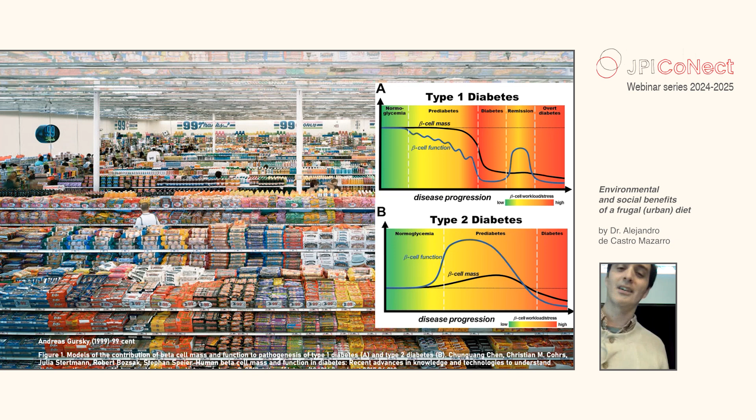It doesn't have to do with what people do with the bars or the supermarkets, but it's actually an illness stored in a very humble organ, the pancreas. The pancreas—if you cut one open, you will not see it directly—but you have to look at something called beta cells in the pancreas and see their performance depending on how you take sugar. There are two different patterns, and we could go on and on.

So basically, the idea is that healthy cities don't need to be necessarily nice cities, and sustainable cities don't need to be nice cities either, but they might be something different depending on how you look at health or sustainability. What I'm looking at is cities from a purely material perspective—what are these things that are on the crust of the planet?

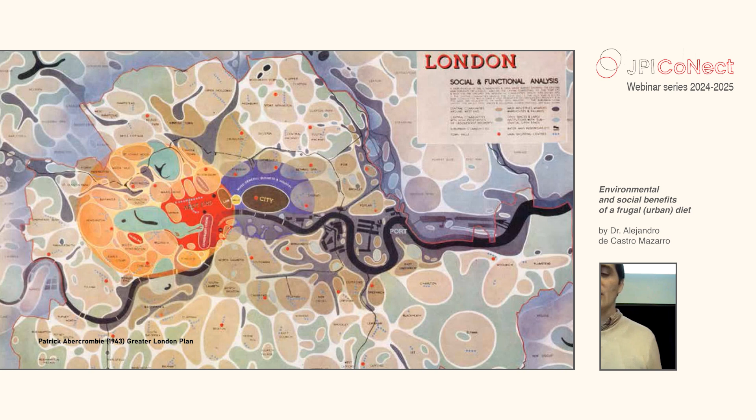This is something not new. This is a map from Patrick Abercrombie for the Greater London Plan, 1943, imagining the city as an organism that is evolving and growing and so on. But if you take this material perspective, one might look at cities slightly differently.

Now, how do cities become healthy—and I would say I'm calling healthy, say, sustainability—like a normative notion of a good city, a sustainable city, the way we understand them now, not only in Eindhoven, but the city of Dresden. When you look at it, fantastic greenery, there's a river, an old bridge that has been preserved—all of it is fantastic.

What is the normative idea of what a sustainable city is? Well, we don't have a collegiate body of doctors and so on that discuss about it. And I would even challenge to say that there is no theory of it. There are theories about it, I think there are discourses about it. And what I have been looking through my research is the discourses of sustainability within architectural production.

I would claim that the dominant discourse for sustainability, what I call eco-modernism, is the very assumption that Anna just mentioned, that economic growth is something positive when coupled with high-tech industrialization because it can provide social equity and even reduce environmental harm. This is not something a couple of people with black jackets thought in a room, but it's something that comes throughout the 20th century.

Particularly, aligned with modernization theory, this might come from what is called the Kuznets curve. Kuznets, a Nobel Prize winner from the US who coined and kind of organized what we call now GDP, accounting for how many assets a country has, found in historical research that he did in the United States that between the late urban industrialization and the 1950s, the growth of income grew in the country, producing the following curve.

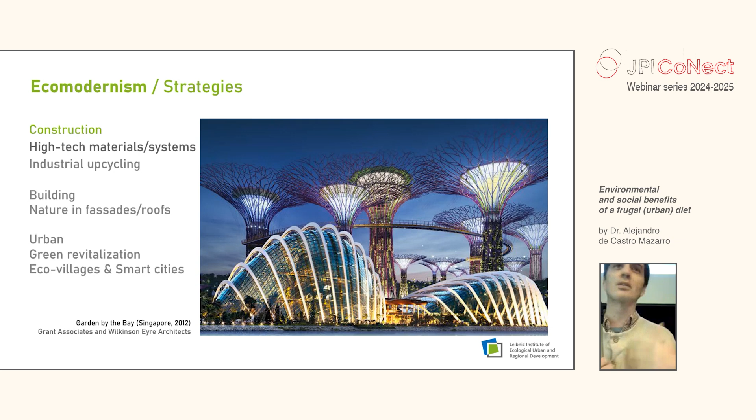This is with the example of Singapore Gardens by the Bay, which have a wonderful weather of subtropical cloud forests at the equator line, and somehow it's sustainable because the AC system is super efficient. At a building level, it has to do with the incorporation of nature in facades, the famous project Bosco Verticale by Boeri, and then at the urban level, eco-villages and smart cities.

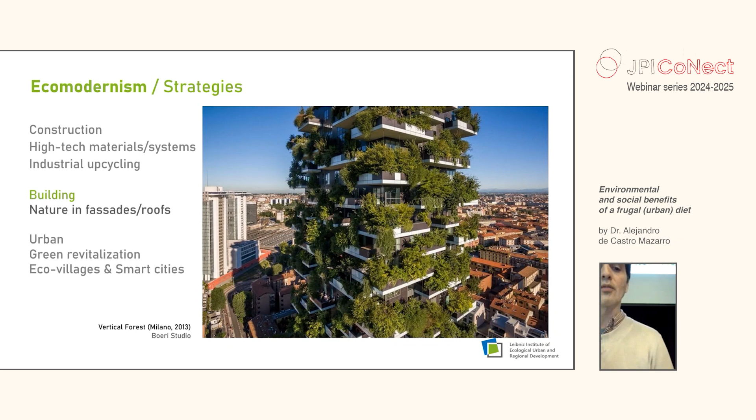I'm not going to stop on them. So that is where the normative dominant discourse is. However, there is some suspicious data that comes up when we look at the materiality of cities, not so much at the relative efficiency of new cities.

If you look at Germany, it consumes 66 hectares of new land every day for a population that is barely increasing. It increases the living floor per dweller, even though families are not bigger on average. We produce 6 tons of construction waste per person in a year, and buildings last very little, even those that are modern. So from a material perspective, we are producing and excreting a lot of matter.

From a material perspective, even very high efficient homes like this famous house from Werner Sobek is located in a place with extremely low density, in a very suburban area, which means that it's a very efficient house in a very low efficient settlement that requires a lot of piping, cables, lines, roads, asphalt, etc. So the material consumption, not the relative efficiency but the absolute material consumption, is to be doubted. Yet it's something that is not so easy to see. It might be super green, but it might still be digesting a lot of materials.

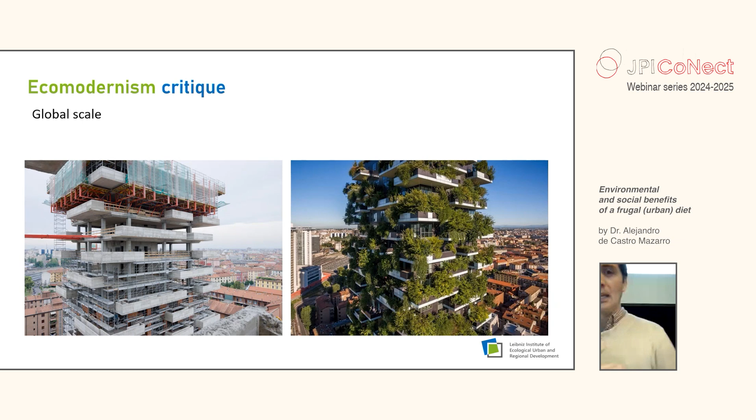Indeed, recent research has tried to compare how much anthropogenic mass produced by humans weighs compared to biomass. Don't ask me exactly how this was calculated, one could gauge it, the research papers are there. The research came to a very shocking realization: anthropogenic mass weighs much more than biogenic mass, meaning all plants and animals together are lighter than everything we have produced in history.

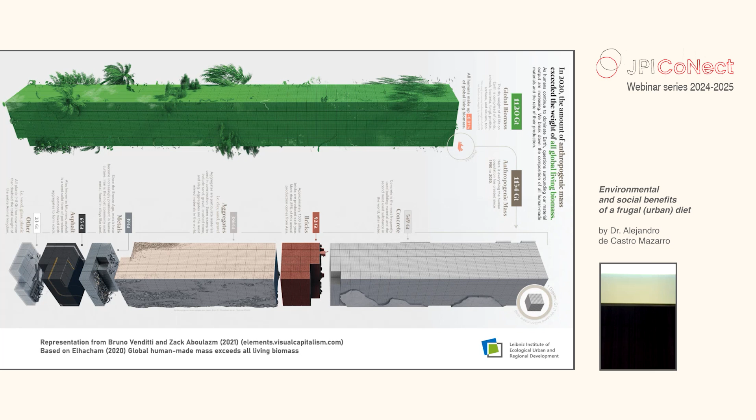And the interesting thing for us is that the author says maybe approximately 50% has to do with construction. If you look at the diagram, which I turned because it's very big, almost a third is concrete, almost one sixth is bricks, another third is aggregates, which include cement and sand, and then you have metals and asphalt, which is another one tenth. It's a lot of matter that we are digesting and producing and excreting, which is compatible with efficiency gains, but not with absolute material reduction.

Last but not least, post-growth or critical economic theories have been revising these assumptions of ecomodernism. Thomas Piketty, who you might have heard of, analyzed the continuation of the Kuznets curve—what happened with income distribution after the 1970s. And yes, income inequality rose, which means there is no natural distribution or redistribution of wealth through growth, but actually the opposite can happen.

Giorgos Kallis, a very renowned scholar, and Jason Hickel have recently published another very interesting research paper saying that there is no evidence that green growth is happening. When you look at GDP and material use, they are very much correlated, so the more GDP, the more materials you consume. And when you look at absolute material consumption per country, including Scandinavian, very advanced regions, countries are consuming more matter day by day.

So the critique is a bit obvious. Let me try to be faster.

The point of what I am trying to bring to my research now is to analyze the landscapes that provide those materials for cities: asphalt, cement, steel, etc. It's hard to know where to stop, because basically it's not that materials are taken from the landscape, but entire landscapes are materials. If you think about it, in the production of materials, water is quintessential. So we don't know how much water is required as aggregate in the German construction sector, but definitely you can imagine the numbers are extremely high.

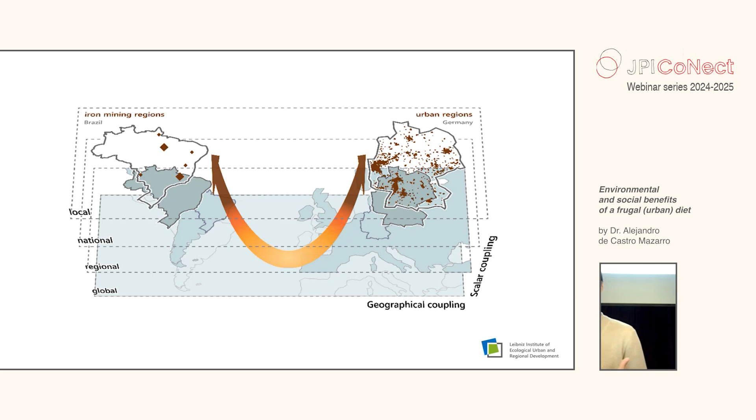So there is a historical question about the materiality of construction: where do cities materially come from? It's a long story, and I hope that I can share this discussion with you. I'm trying to really find partners for several elements, but it's a bit of a quantitative thing. So if that's a problem, post-growth or degrowth as a heuristic offers some frugal alternative to that.

In a nutshell, it is not opposed to efficiency. Efficiency is wonderful, but it proposes an absolute downscaling of resource consumption. So it proposes a democratic downscaling of production so that wealth and resources can be distributed where they are needed. So places that don't have trains can have trains, and places that have a lot of trains can reuse the trains or learn to recycle and so on, and try to decommodify wealth as a way to reduce the throughput, or reduce the metabolism of cities.

So rather than churning materials into a circular economy that goes faster and faster, they say the only thing we can do to reduce entropy is reduce the flow of materials. That's why they use sufficiency as a strategy compared to efficiency. They talk about convivial technologies, frugal innovations, which are terms that relate to simple ways of operating with materials. And of course, they relate to behavioral change.

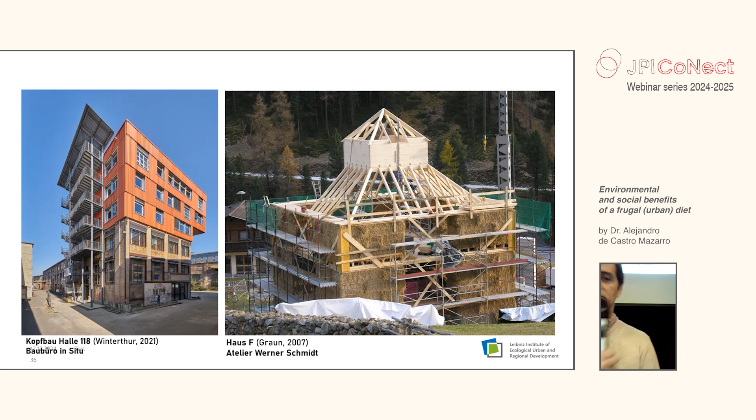At the material level, there is a lot of investigation now into how to use, I don't know how to call this in English, hay construction and mud construction. Straw bale, yeah. And from the material construction, there are some very creative experimental exercises. In more real works that I would recommend, Rotor in Belgium is a very interesting practice, really trying to make a business out of dismantling buildings. In Germany there are also new initiatives, with a site called Concular. It's kind of an eBay for building parts that is kind of working.

However, even though there are some very famous practices, this is where it's hard, because it's very hard to move away from structural concrete, in the sense that for insurance and density purposes, it's very hard to know who will insure a building that is not following the regulations of structural concrete. As you see here, this is a famous building that I am still uncertain, after having researched, whether it has concrete inside or not. I'm sure that the architect really tried to experiment, but I have not seen the section of every element. But you see Herzog & de Meuron, for example, in the Ricola Kräuterzentrum, done with earthworks, and yes, it's done with earthworks mixed with cement with structural concrete.

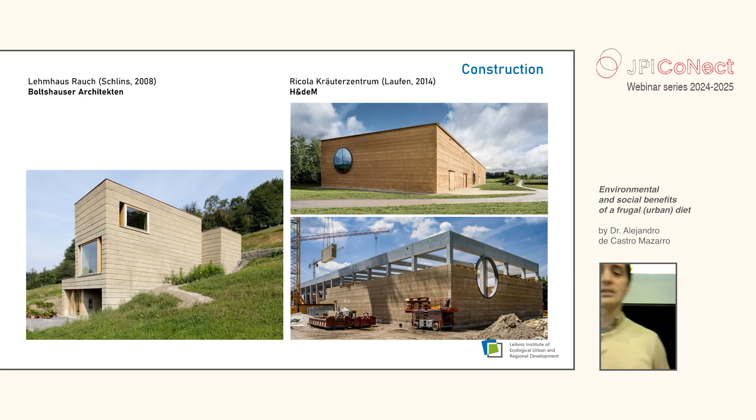So there are a lot of challenges, but I also find there is a whole new pedagogical field to develop. How do you become creative if the constraints are that you want to reduce the absolute amount of matter that you circulate? That is something interesting. The last part, and I'm over my time, so this will be very short. It's about some remaining challenges to this field.

It sounds like, after the second part, we would say: so you have the world for you, just do it and then do new buildings. It will work out fantastically. I tried it myself, out of self-esteem. I went to a competition with some colleagues in a city whose name I will not name, but it will be perfectly fine. We lost it. So I am advancing the end of this.

We lost the competition. So it was a city from the 50s, 60s, that was based on car traffic, very gray. People hated it. There was a survey for the neighbors. They wanted it to be pedestrian, no more buildings, please. We just want a place where we can be together, just as simple as it sounds. And we thought, well, this is a perfect place to make a competition on degrowth.

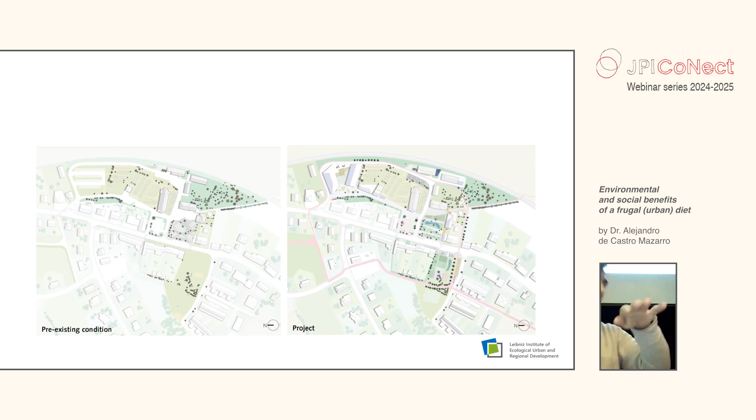So there I went with my colleagues, and we said, let's do a competition entry that is explicitly on degrowth or sufficiency. The title was "Small is Beautiful" in the local language, so that they know it. So it's really about that. This is before and after. What we basically did is try to keep all the buildings that we could, try to de-urbanize things following the scheme, reuse materials to recycle them inside, and put the program in the corners we could, changing the height of the asphalt in cases so that people could not trip. Very basic things, and we did some images of how it would look, etc.

And other things won, and I'm very happy for this. But it was very interesting what the jury said. It was really for me a way to test what they will say if all of this is good and it goes with the population. What will be the answer? The interesting thing is that the jury said, in the part on innovations, nothing. They wrote the word nothing. They said it doesn't propose anything. There is no added value.

This one won, and as you can see, it looks very nice. There is a building here on the top, another building, and there are other buildings there. They occupy, on the top left, the green area that was unused that the neighbors wanted to protect. So the interesting thing is that it's not just important to try to do things with less material, but there is another gap, which we're trying to figure out: how to express why those things are really relevant. The way that I name it is, why is that better than the green mushroom? That you make a big mushroom, put some plants on top and say, oh, it's great, it's green, and it's a mushroom.

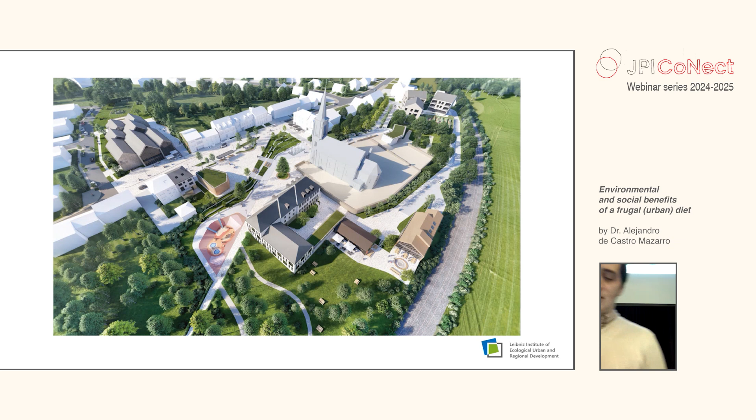With the idea of the major building with underground parking that is very sustainable. So in principle, you say, the people are not ready, we are too advanced and so on. But then we realize that maybe we don't know how to represent these ideas, meaning that the plan is not useful, maybe the section is not useful. But how do we communicate that this is better than the green mushroom? What are the visual means and the argumentative elements that we can use?

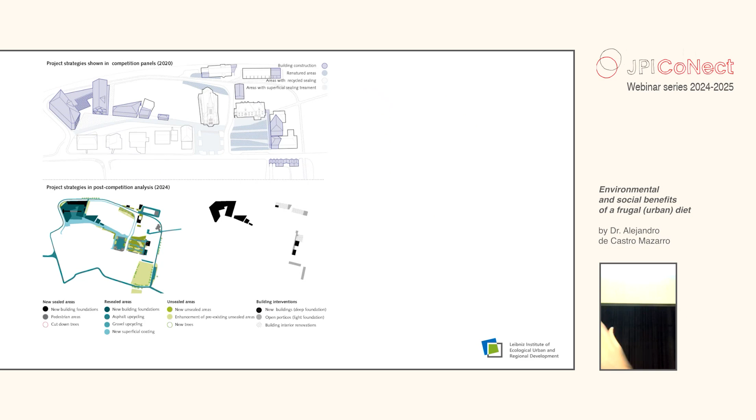On top is the image of the diagram we did there, where we try to see what we keep, the floor that remains, and so on. After the competition, we redid it with a different categorization, where we identify sealed areas, newly sealed, resealed, unsealed, building interventions. What is the vocabulary that we need to create in education so that these things can be visible as part of our documentation?

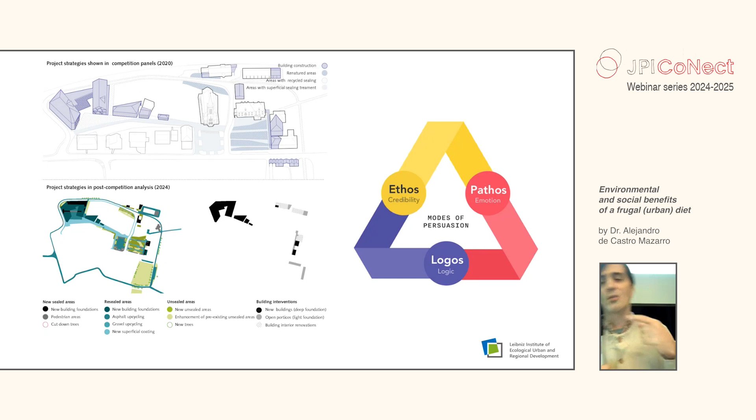So my last slide would be that, as simple as it sounds, I do think that this is not a thesis and antithesis discussion. This is an argumentative discussion. So it's not that post-growth is better than growth, but rather that we need to learn what arguments post-growth can make and what the evidence for it is, because I see that it's not so clear, even though it sounds like a very good idea.